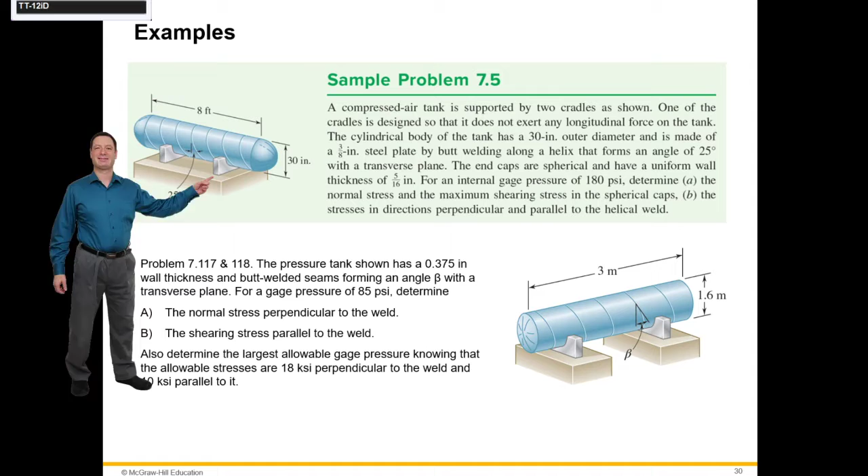So we're going to be looking at basically the stress element that's on its side. This is the sample problem we're going to do right now. Let me switch over to the document camera. Hold on. All right, so here we are. Yeah, this is live, this is working.

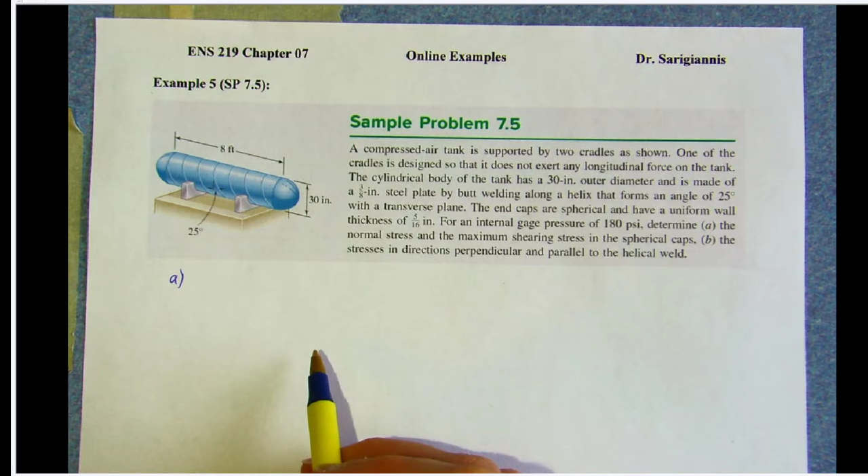So part A is to look at the spherical caps, right? Let's just consider what's going on here. Let's see, we have a few things. This is not necessarily part of the problem, but I do want to bring this up. So consider you have a shell wall of a certain thickness here.

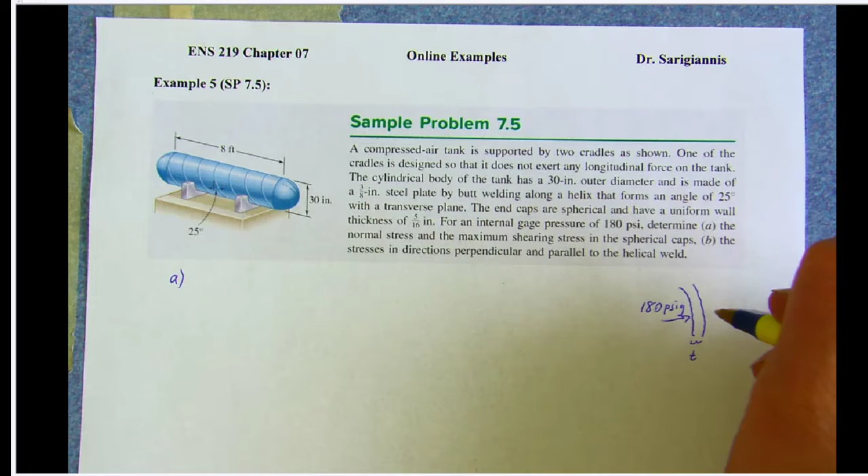If you have 180 psig on the inside, right, this is gauge pressure, so we only have to worry about gauge pressure. And this is why a lot of cylindrical manufacturers - pressure vessel specs and stuff are listed in PSIG. You don't have to worry - you typically use these things at atmospheric pressure.

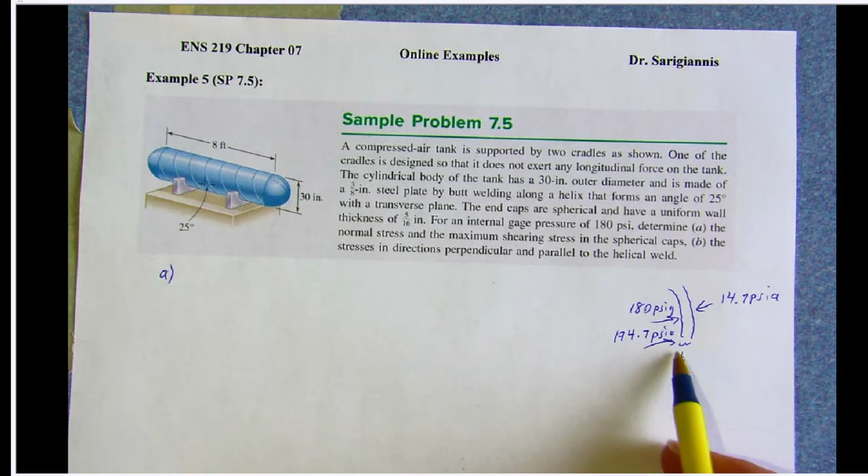So there's 14.7 psi on the outside - this is absolute pressure, right? So internally you actually have 194.7 psia, but because you have 14.7 on the outside, those two - basically the 14.7 on the outside and the 14.7 on the inside cancel out. So you wind up with a net 180 psig on the inside. You guys should remember this from thermo.

Yeah, so that's one of the things that tie these things together. Also, remember for thin-walled analysis, R over T should be greater than or equal to 10. So what is that? R is - where is R? Oh, 30 inches OD, so R is 30 inches, and thickness is, we'll take the bigger one, 3/8.

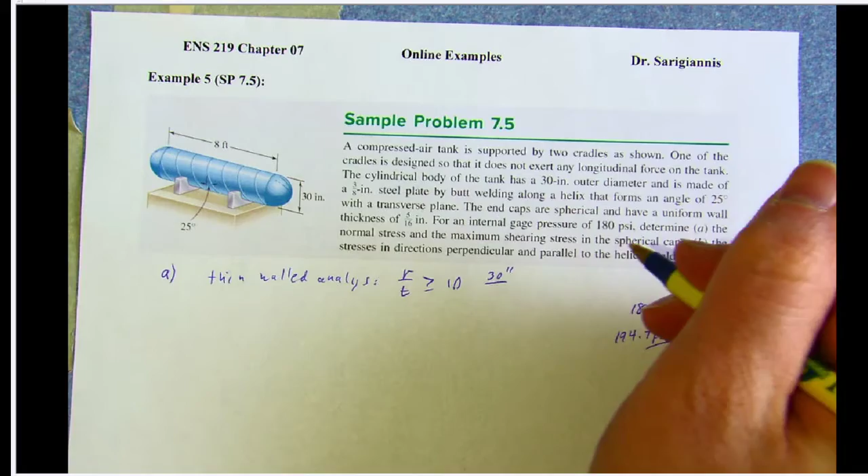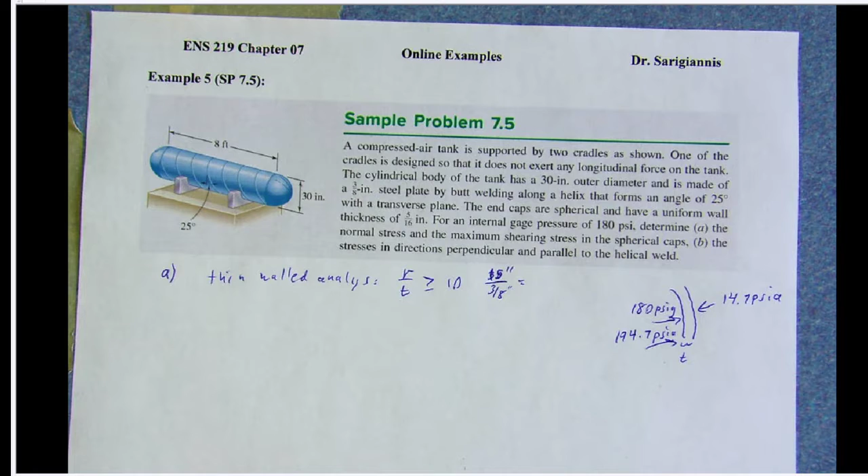And this is going to be, basically - wait, did I take 30? It should be 15. Radius is 15, I was like that doesn't look right. Yeah, so 15 divided by 3 is 5, times 8 is 40, right? So that's okay, that means you can use the thin wall pressure analysis assumptions.

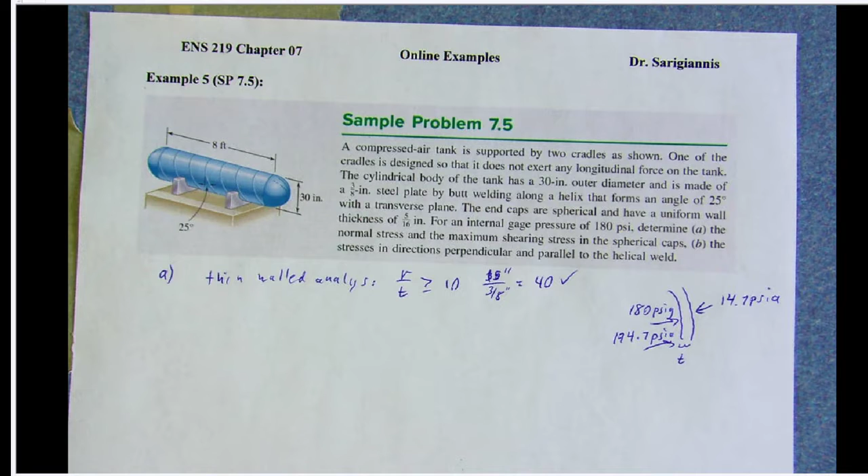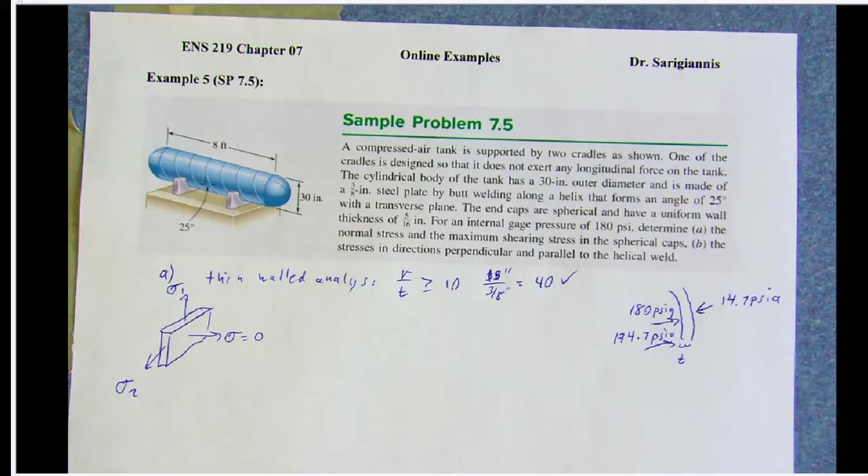Okay, so let's look at a component of this. A stress element anywhere on the sphere. Let's just draw it like this. We've got sigma 1 and sigma 2, and the analysis assumes that this is sigma equals 0, the sigma, or you can call it sigma 3.

So this is normal, so this would be inside pressure. This is an element on the outside here, right? Sigma 1 and sigma 2. Now for a sphere, right, for spherical caps, sigma 1 equals sigma 2, and that's equal to PR over 2T. This is equation 7.36 in your text.

Our actual radius is technically not 15. The radius is actually 15 inches minus the wall thickness. So for the sphere, we've got not 15, 5/16 inch. So the radius is 15 minus 5/16 inch, and this is going to equal...

14.6875 inches. So sigma 1 equals, we've got 180 psi, and we've got a radius of 14.6875 inches, over 2, and then the thickness here is 5/16 of an inch. So we wind up with a sigma of 4230 psi. And remember, that's in both directions for a sphere.

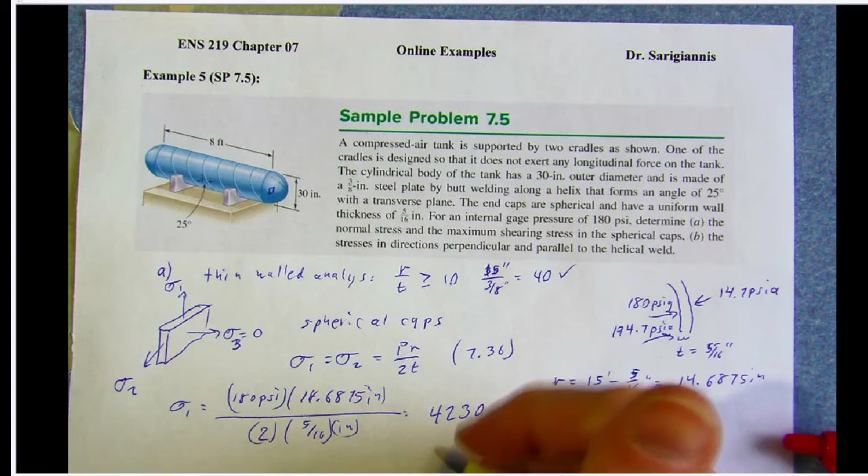This is just sigma 1 and sigma 2. So this is the normal stresses, right? These are the normal stresses in the sphere. Normal stresses.

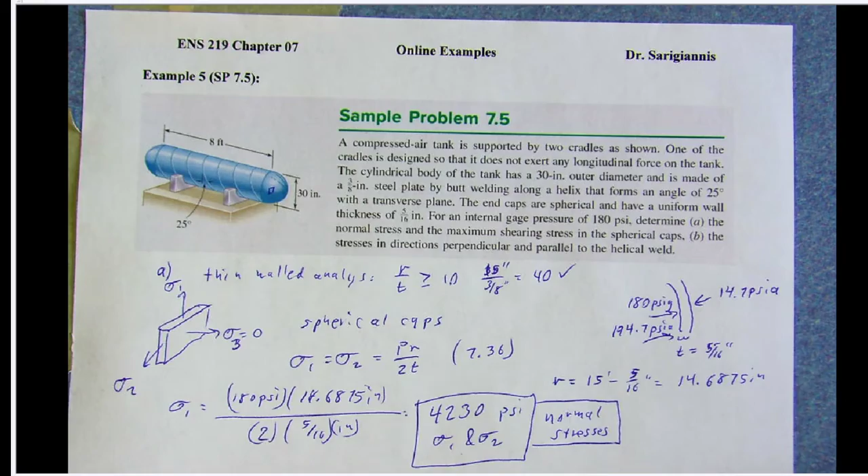All right, for a spherical shell, we know just from the text - I'm trying to remember if this was in the video - tau max is just equal to 1/2 sigma. This is actually explained in your text using a Mohr's circle, but it's basically because both your sigmas are the same, right? Sigma 1 and sigma 2 are the same.

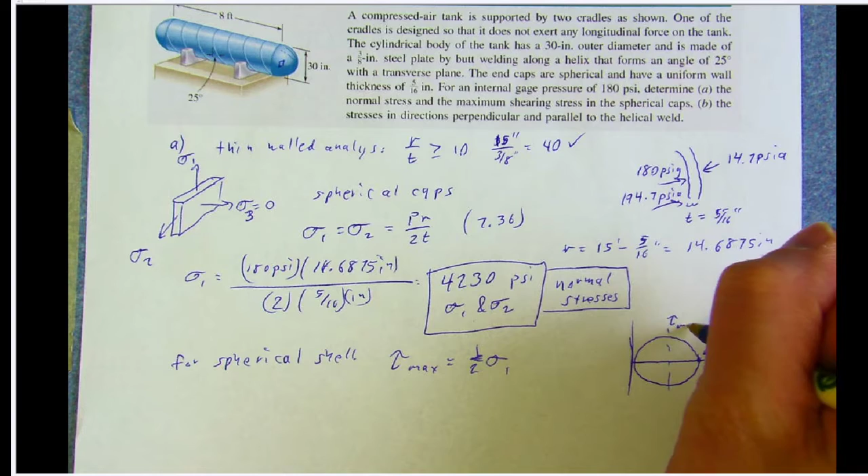Your Mohr's circle looks kind of like this. You've got this point here, this is sigma 1 and sigma 2, right? And you wind up with a circle that goes around like that to 0. Because there is an orientation where you have - so you have an orientation where you have a tau max, right? It's just the radius of the circle, which is just 1/2 sigma 1.

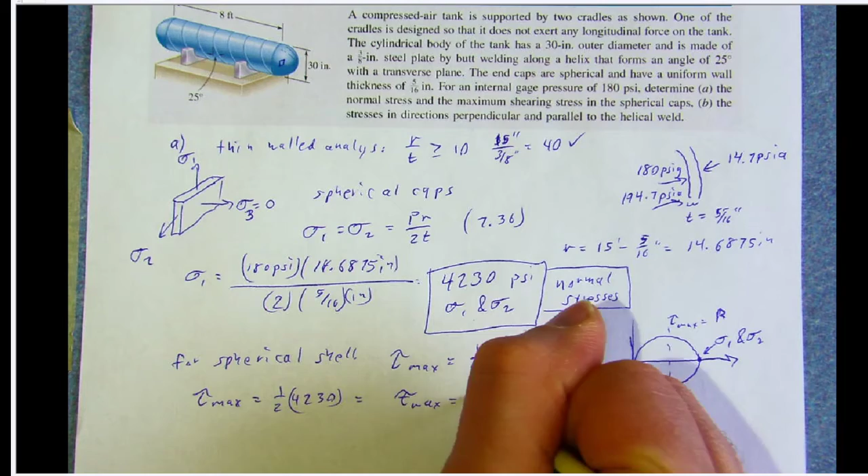So tau max equals 1/2 of 4230, which equals - and I write this down - tau max, 2115 psi.

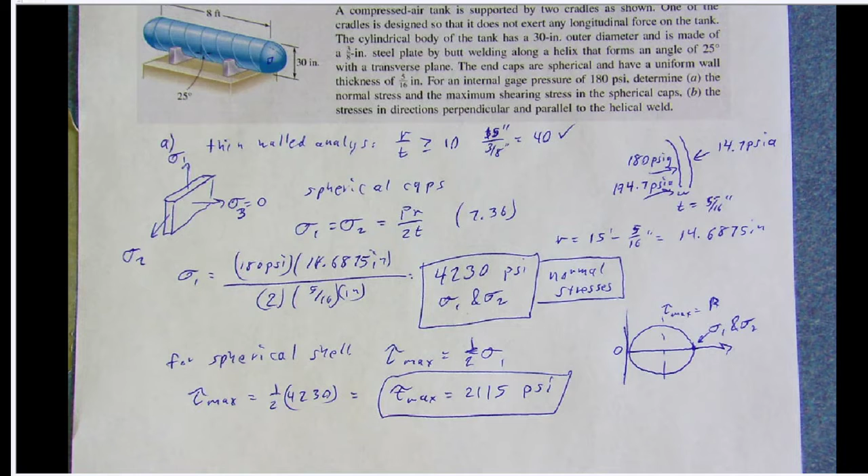This zero, I should mention, actually comes from the 3D analysis, right? So if you want, hopefully you watched the video on the 3D analysis, which shows you can make the overall circle. Ideally - well, not ideally - but this is basically happening in the plane tangent to the surface of the vessel. So that's where you're finding that shear stress. Max shear stress is 0.

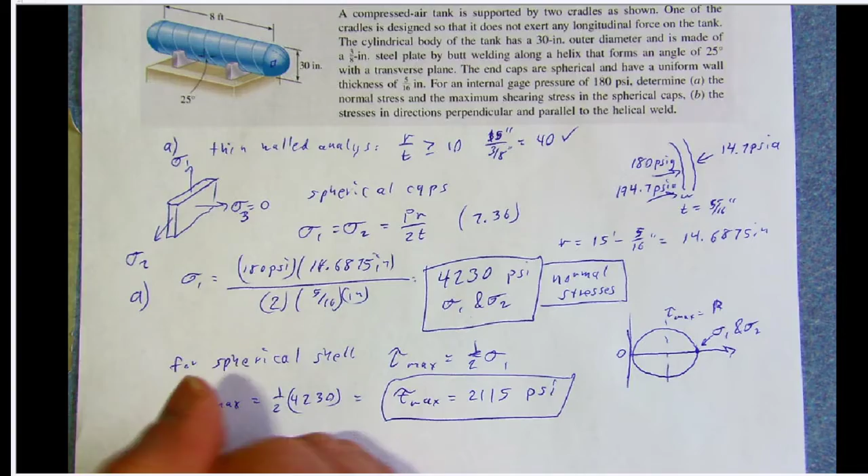Yeah, all right, so that's part A. Let me just label this part A. Part B is looking at the stresses in directions perpendicular and parallel to the helical weld.

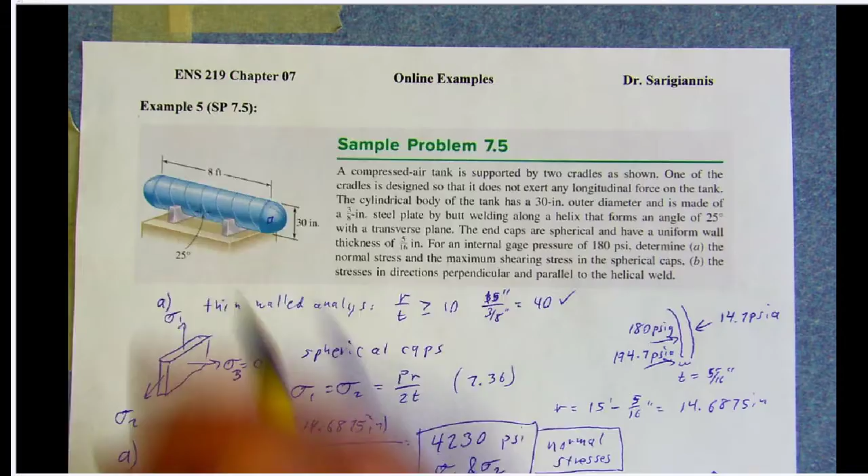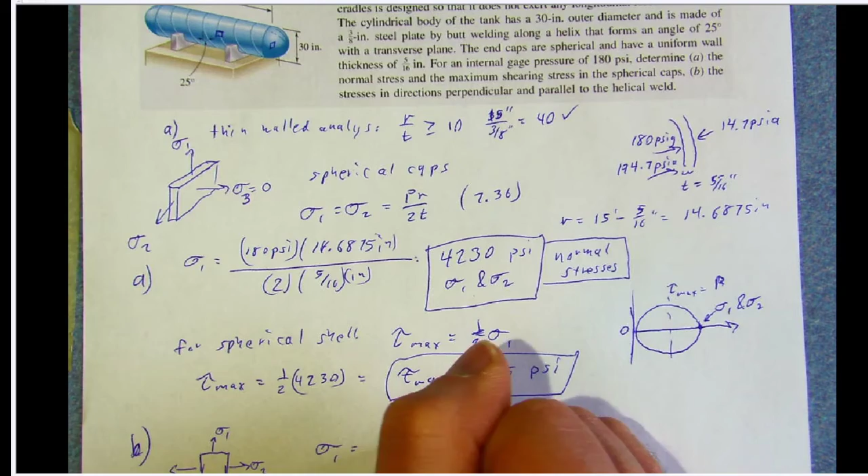All right, so let's just pretend for a minute here you're some kind of element on this cylinder, right? So if you're a little element on this cylinder, any point in that cylinder you're going to have - and remember, they define sigma 1 and sigma 2. Sigma 1 is the hoop stress, right? This is the stress if you were to cut this cylinder this way, and look at a hoop, that's the stress around the hoop, right? And sigma 2 is the longitudinal stress.

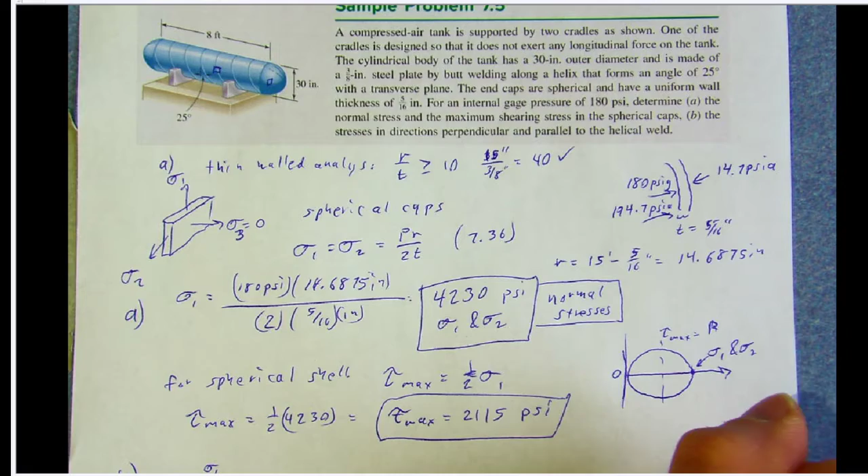And that's the stress along the length of the cylinder. And remember, that's typically the lower value - well, it is the lower value. So sigma 1 is... so what we have to do first is find, for a given element, we have to find these stresses, right? The hoop stress and the longitudinal stress.

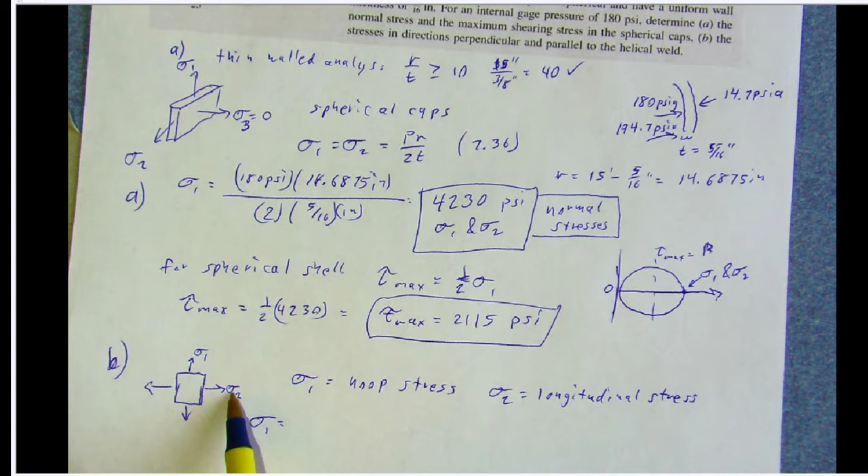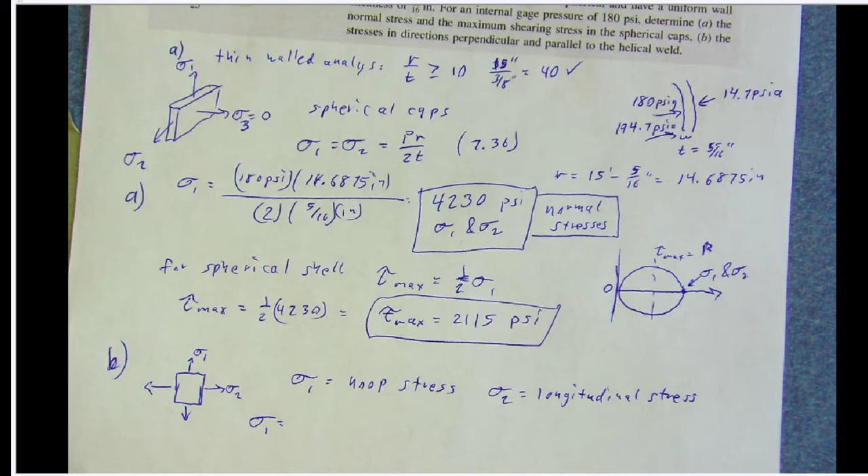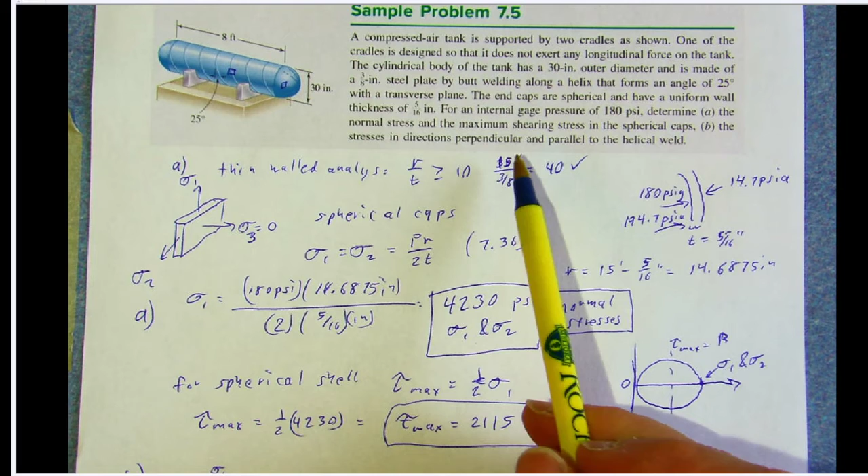Then we can look at the orientation of the weld, and we can use Mohr's circle to reorient this element to align with the weld and figure out the normal stresses and shear stresses on the weld, right? So the stress perpendicular to the weld is going to be the normal stress at that angle, and parallel to the weld is going to be the shear stress.

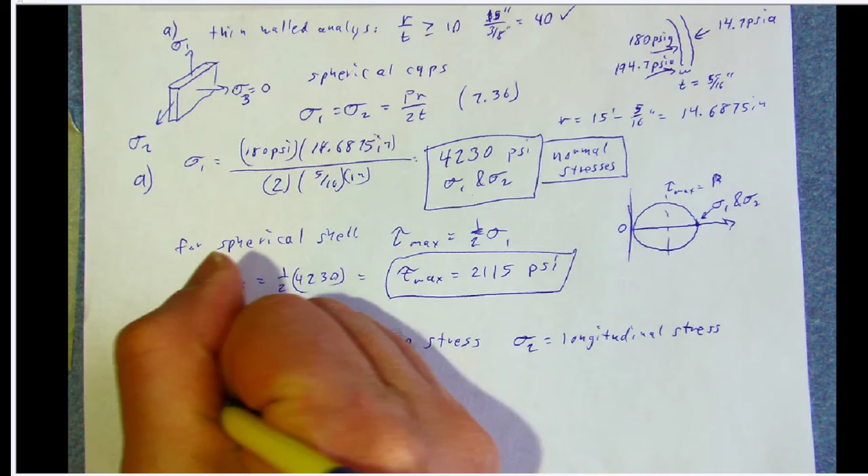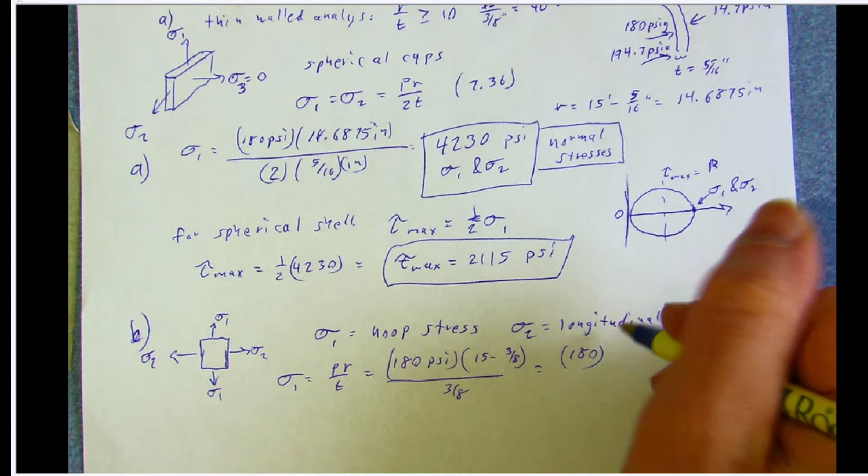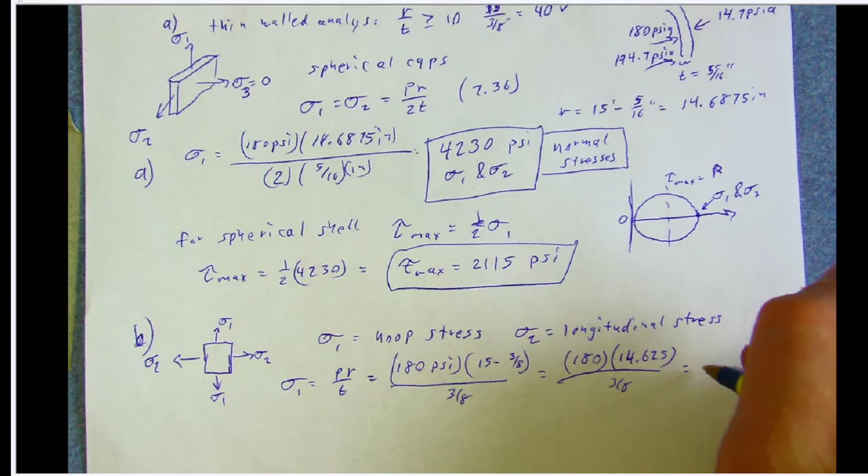So that's going to be 15 minus 3/8, over 3/8. Let me just write the numbers in here: 180 times 14.625 over 3/8. This gives you 7020 psi. So that's sigma 1. Let me write this in up here on the diagram.

Just remember they're using English units. I'm not going to crowd up that diagram too much.

Sigma 2 is the longitudinal stress, given by the equation PR over 2T. It's half of the hoop stress, so it's just 1/2 sigma 1, and that's 7020, so that's 3510 psi. So that's here.

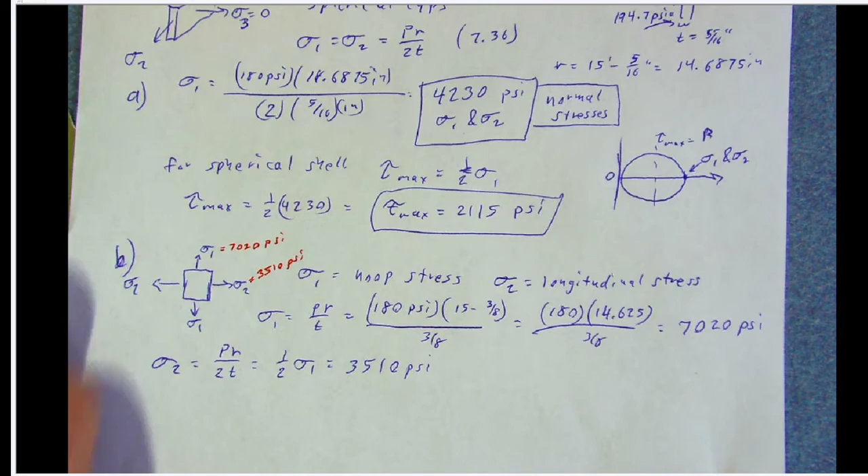Oh, I said I wasn't going to write units, and then I did. I'm a liar. All right.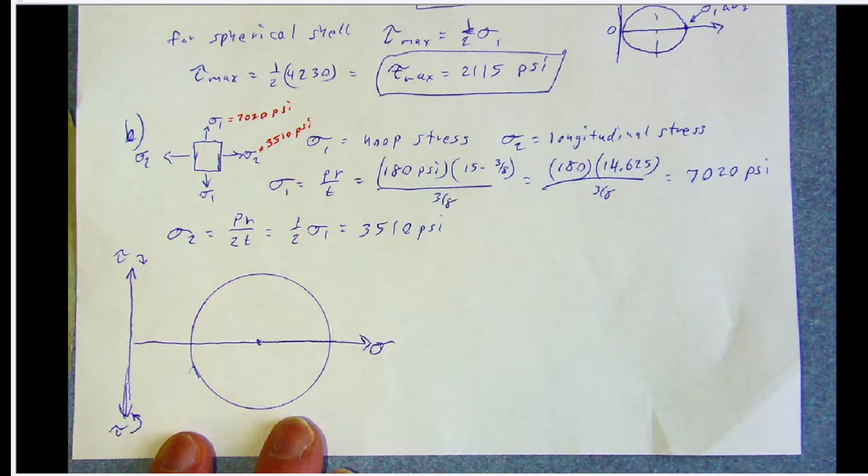So now let's see if I can fit this on here. We're going to use Mohr's circle here. Let me pause this for a minute. Okay, this is not really the most legitimate way to draw Mohr's circle. I do the circle first without putting any of the information on there. And this is really not to scale.

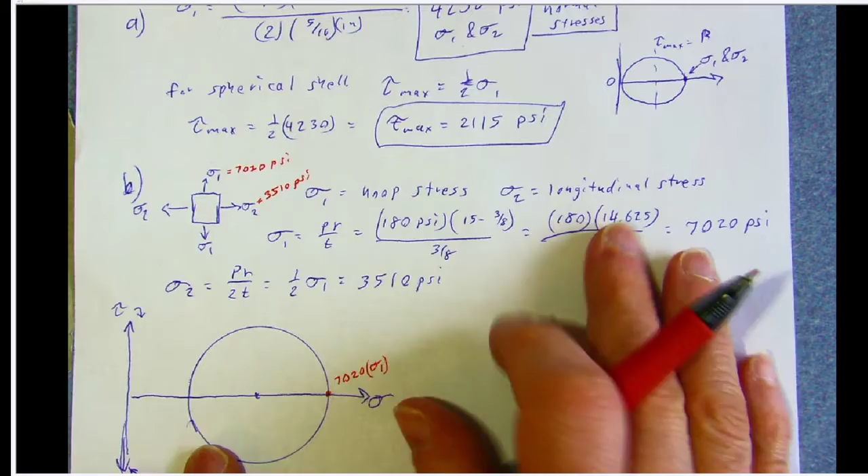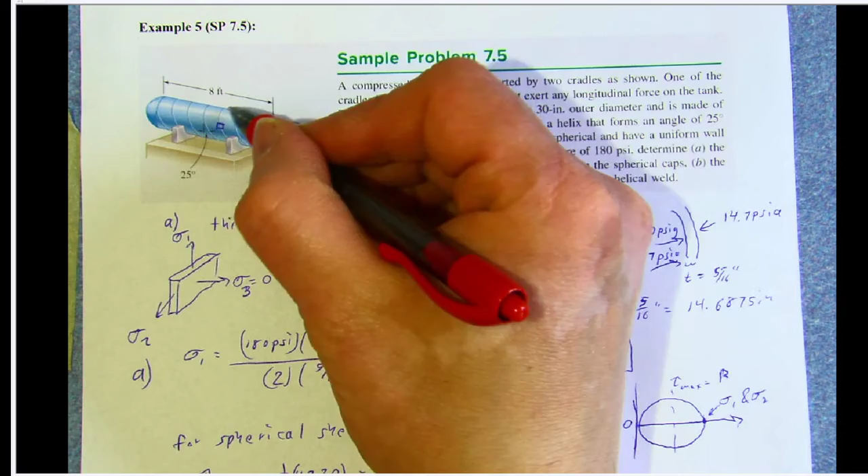This point here is the 7020, this is sigma 1. In your textbook, they use axes A and B instead of X and Y, because these are oriented along the cylinder. Anywhere along the cylinder wall, so they use A as the one that runs along the curve of the cylinder, and B that runs along the longitudinal length. So we'll use that notation.

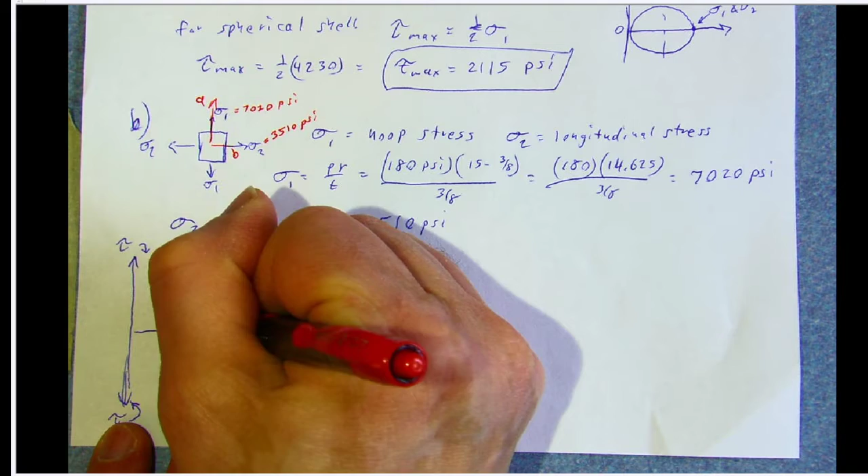This is the A axis, and here we've got 3510, and this is the B axis, and this is also sigma 2. So here's your Mohr's circle, and this one in the middle is just the average.

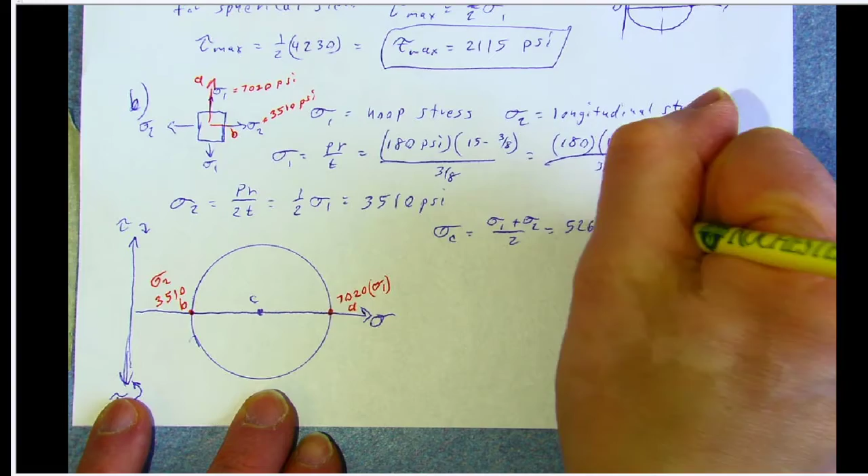Let's write this out. I'll call this point C. So sigma C is just sigma 1 plus sigma 2 over 2, which is the average of the two. So it's 5265 psi.

5265 right here. I mean, you could take the difference, divide by 2, and then add it to the bottom, but that's just a nuisance, so it's just the average. The radius R is going to be sigma 1 minus sigma 2 over 2, right, it's just the difference between these two divided by 2. And that's going to be 1755 psi. So that's the radius.

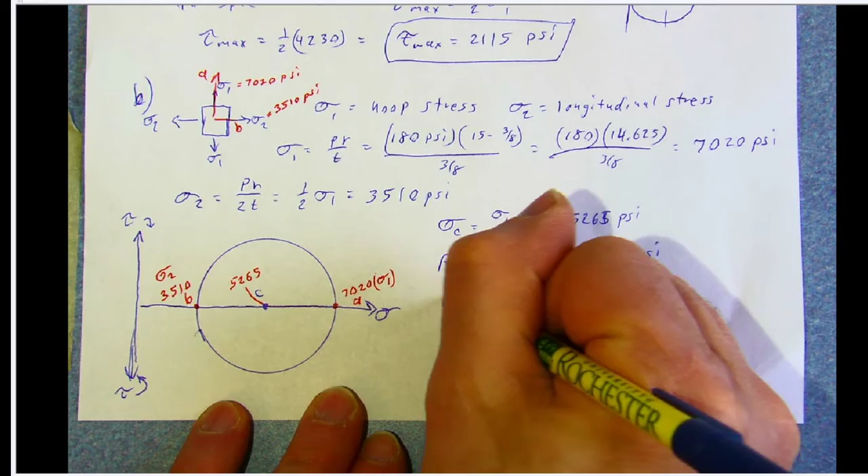Now we have theta of the weld, right? The theta of the weld is 25 degrees. I'm going to have to go to another sheet of paper here. Let's see, do I have one? Oops, this is another problem. I'm afraid to pause my video again.

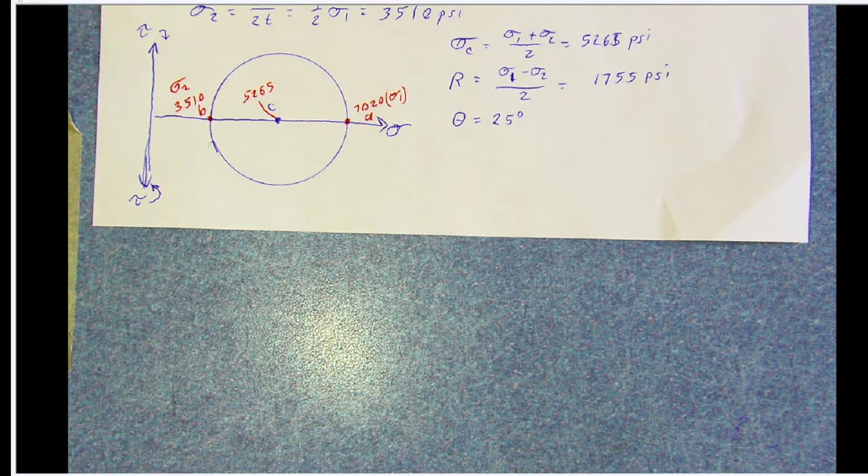Sample problem 7.5 continued. All right, so we have this element that's angled, and this is angled at 25 degrees.

So picture, let's see. I should put a little line here. This is the weld, right? The surface of the weld runs along this way.

And we're going to call this, so notice my axes, sigma 2 is B axis. So I'm going to call this, oh geez, did I mislabel these? Hold on a second, B prime. Let's see what I do. Don't think I mislabeled these.

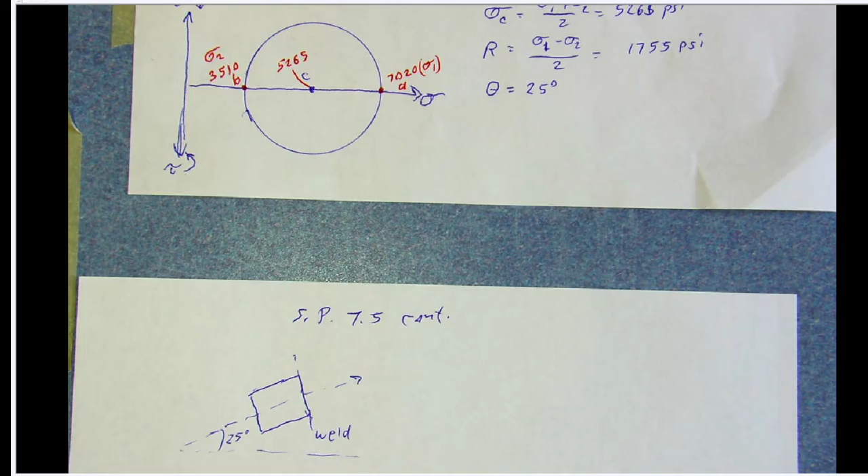No, this is not mislabeled. This is the A prime axis. Sorry, this one up here. Yeah, these are not mislabeled.

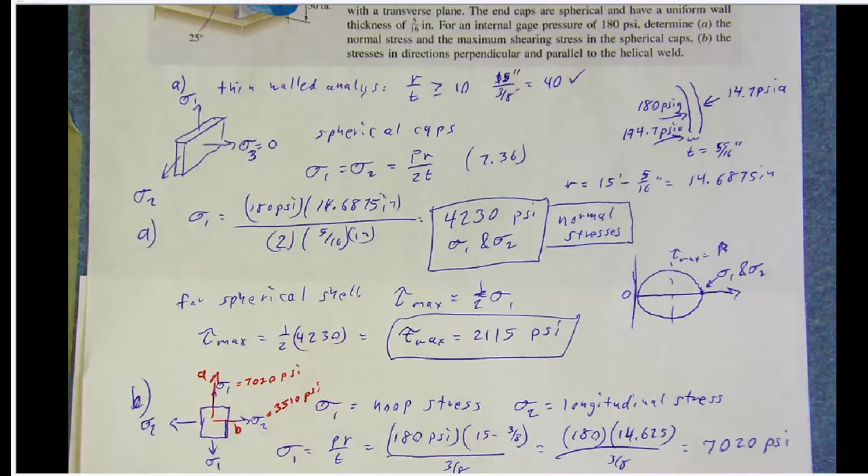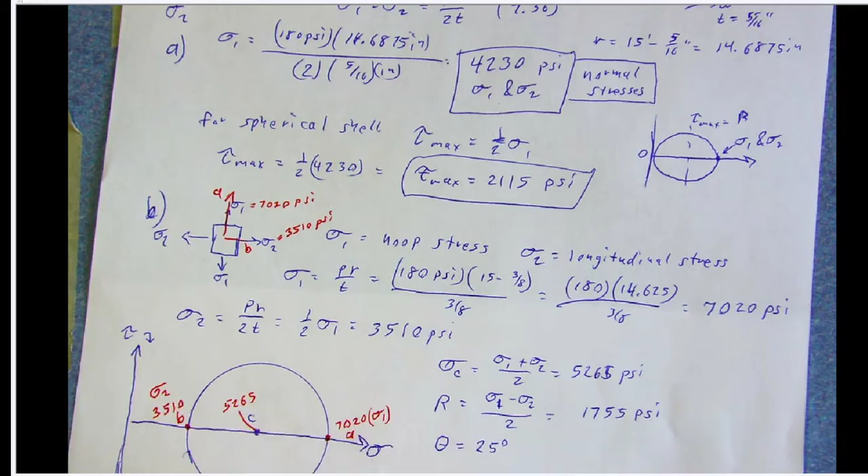Okay, so we're taking this and we're angling it, and this is B prime. Yeah, so I wrote my notes wrong, this is correct up here. Sigma 2 is along B. We've rotated this element, so this is B prime. Sorry about the confusion, guys.

All right, so we're looking for the normal stress along this weld. So this is going to be sigma B prime.

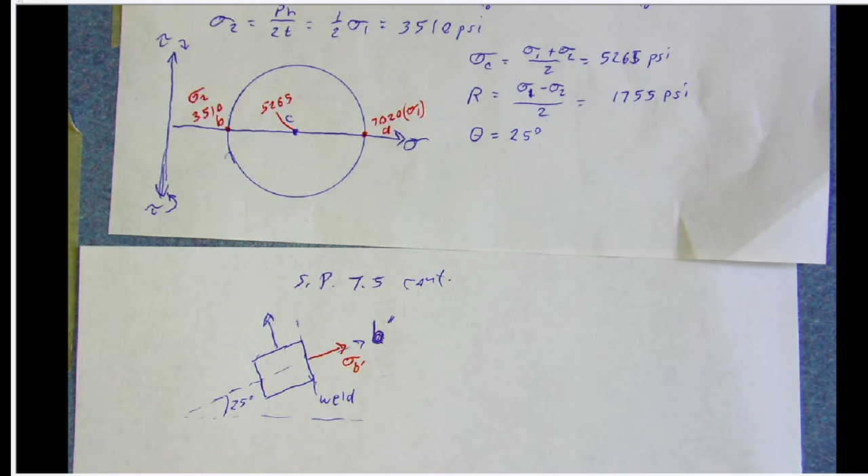So now if we look at Mohr's circle here, remember theta is 25. So in Mohr's world, 2 theta is 50 degrees. So we're going to rotate this whole axis by 50 degrees. I'm not going to claim to draw the correct angle, but I'm going to try to draw something more than 45 degrees.

All right, so here I have 50 degrees, and notice here I also have 50 degrees. This is where it's getting a little confusing, because you started off with Mohr's circle using X and Y,

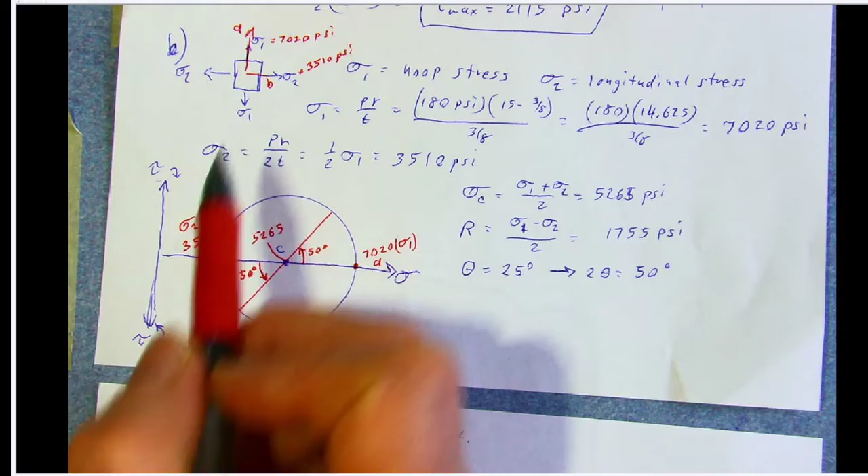but we're switching over to A and B. So A is the maximum, B is the minimum. Notice now I've rotated both of these axes. This is A prime and this is B prime here. So what you can do is use this triangle here. Let's see, how am I going to draw this?

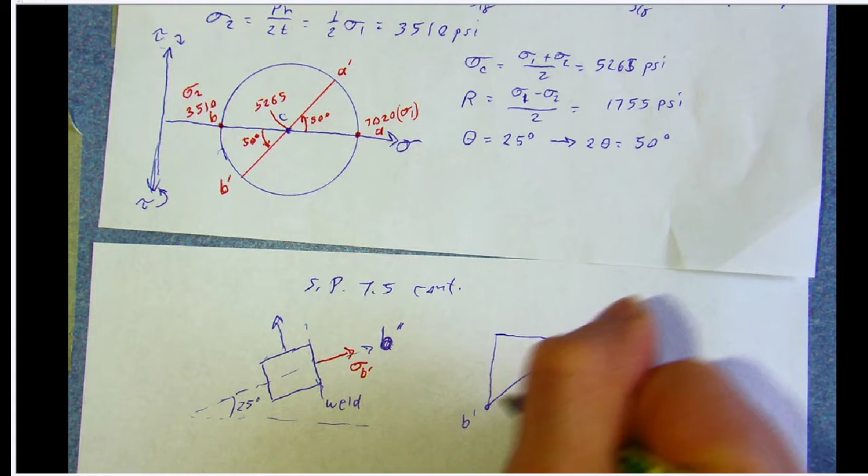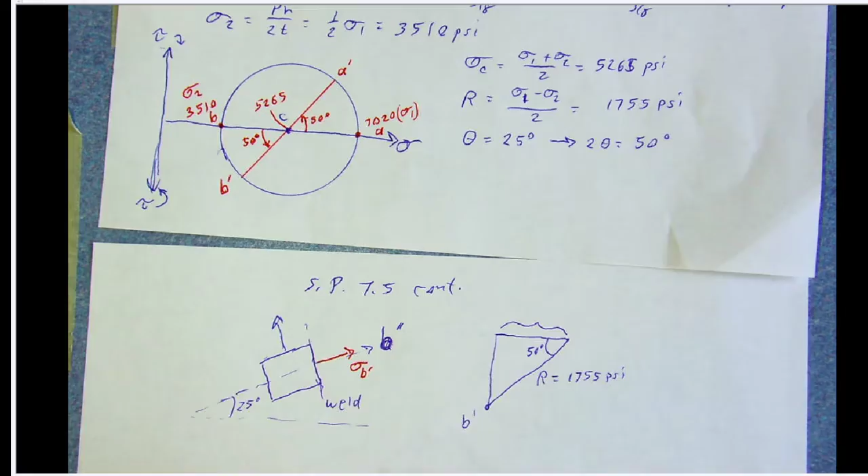B prime, this is the radius, equal to 1755 psi. This is the angle of 50 degrees. So this distance here is over here. So we can find

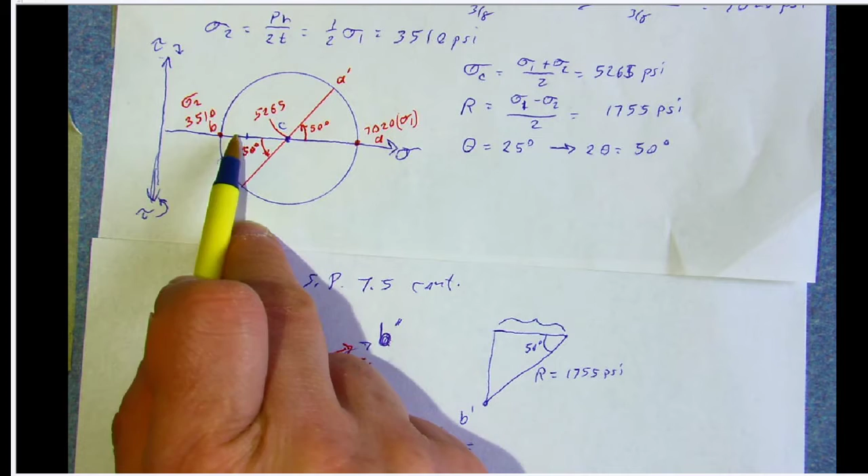sigma B prime as equal to, so this would be sigma B prime. This is sigma B prime, notice it's on the stress axis. This is going to be 5265 minus cosine of 50. This is sigma B, well, that's just the length of it. Sigma B prime is actually right here. And this is 5265, that's the length here, this length L.

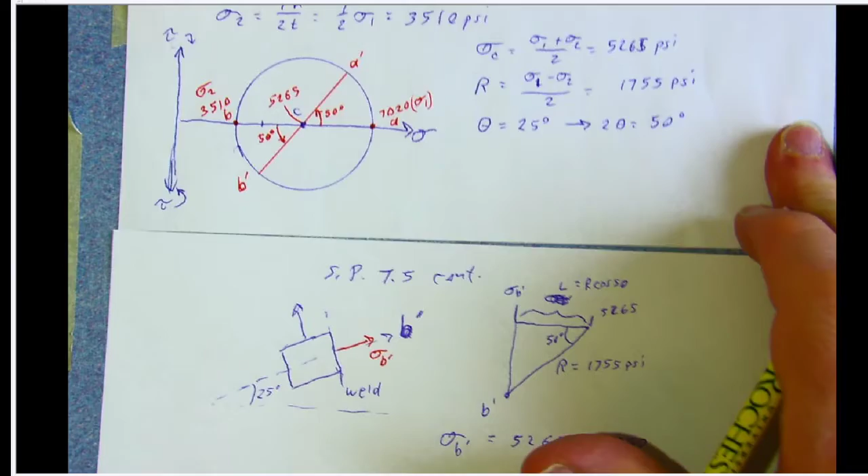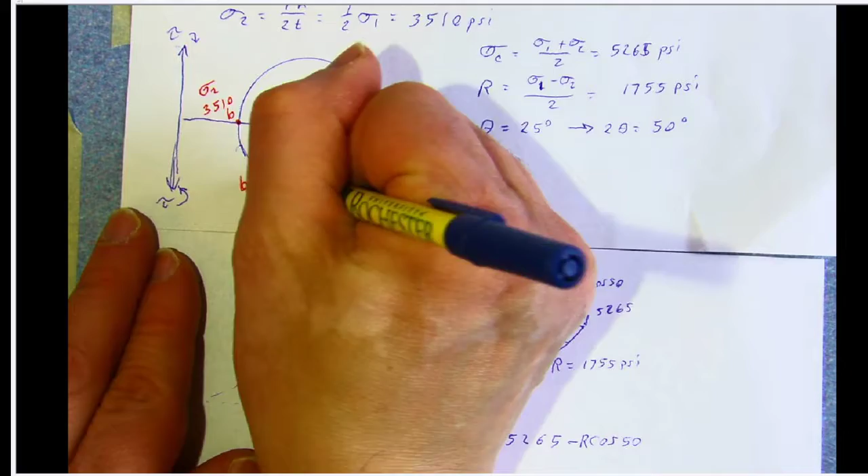So this is cosine 50. Oops, I need the radius, R cosine 50. All right, I think I've tried to use too many diagrams to demonstrate a very simple concept. All we want is the stress corresponding to the B prime point, and that's this. So here we have 5265 minus R is 1755 times cosine 50, and we get sigma B prime equals 4137 psi.

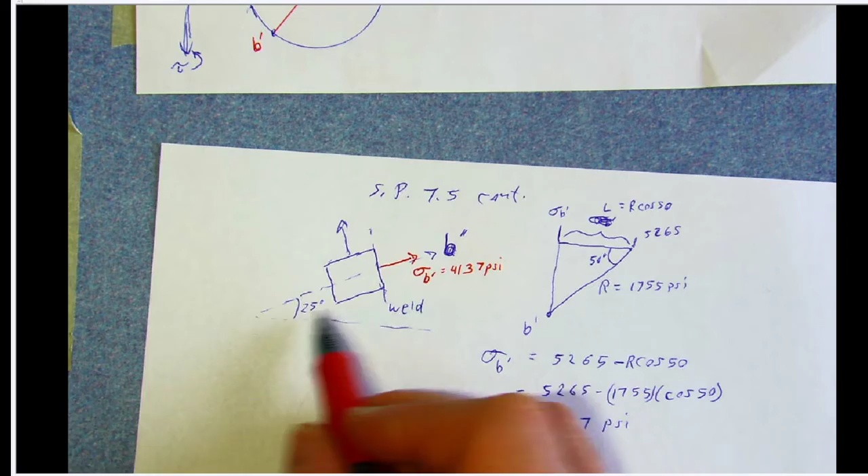4137 psi, so that is the normal stress on the weld. This is the orientation of the weld, it is oriented 25 degrees. Look at it from the vertical, this is also 25 degrees.

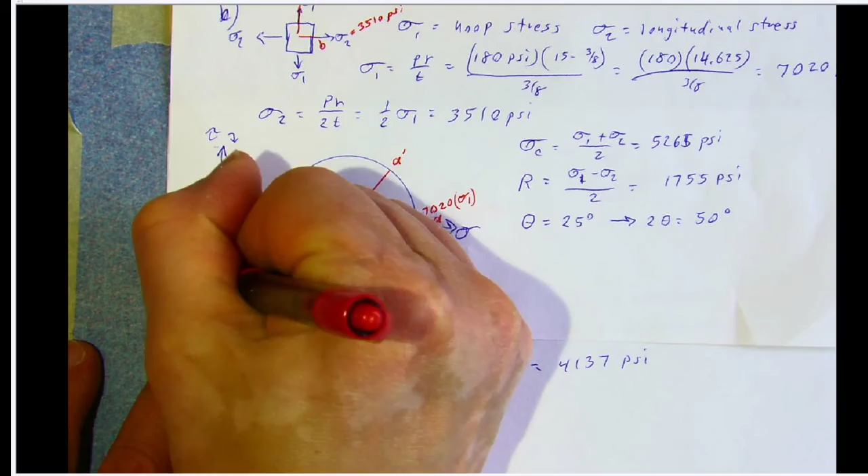Now we need to know the shear stress. So the shear stress is just, if we look at Mohr's circle, the shear stress is just this value here. This is tau B prime, and that's the height of this triangle. So over here, that's this, tau B prime.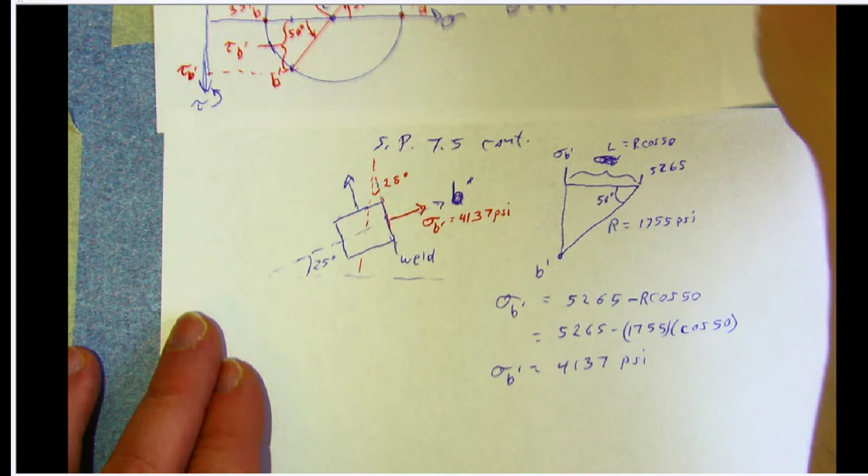So tau B prime is just equal to, we'll put a little, whoop, my screen froze, I don't know why. Okay, I think, oh, I gotta check my sound. You never have, okay, well I always have too many problems with this.

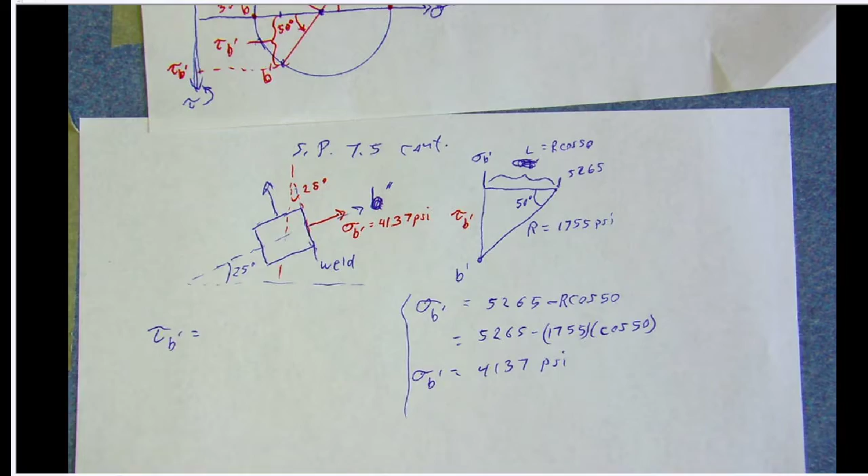All right, tau B prime is just going to be R sine of 50. So this is just 1755 sine of 50 degrees, and tau B prime equals 1344 psi.

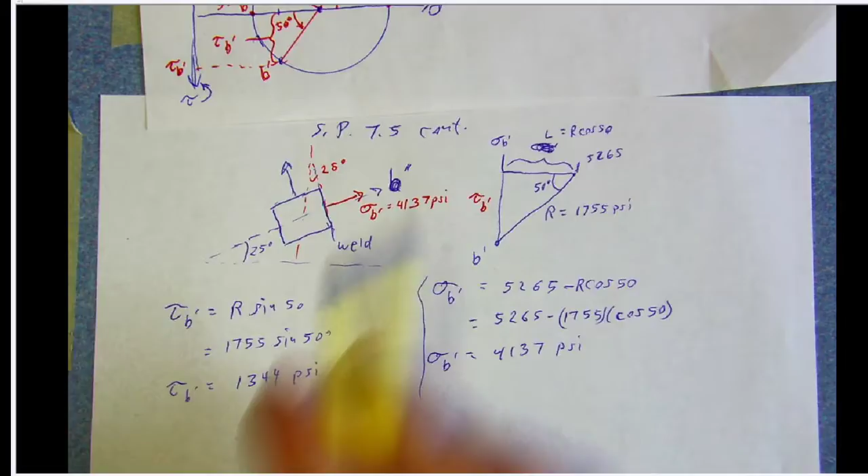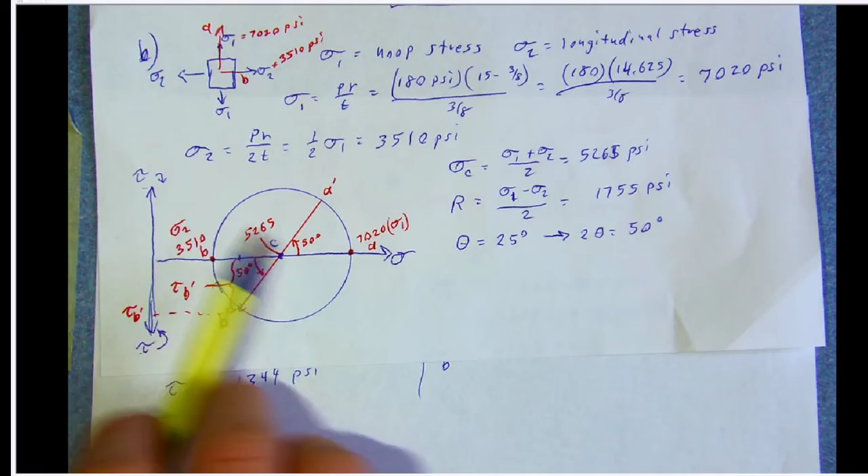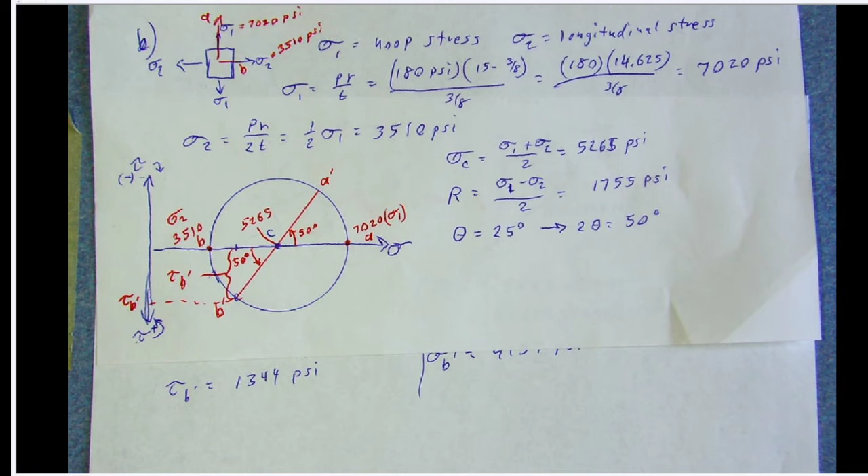Now notice where it is on the Mohr's circle. So I drew this, remember the bottom, well, you can use clockwise. The clock is above the counter. So counterclockwise is below, clockwise is above. Or you can just remember down here is positive, and up here is negative. It's just flipped. Any way you remember it, this indicates a clockwise rotation on the element. So that means the shear is going to be acting in this direction.

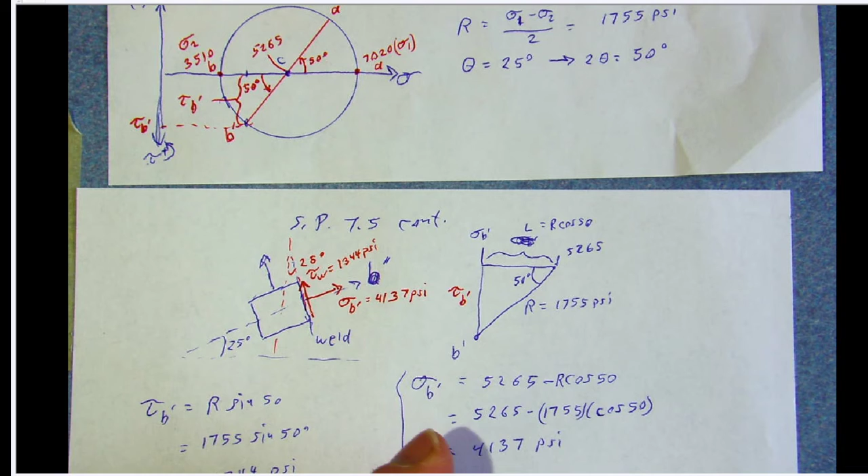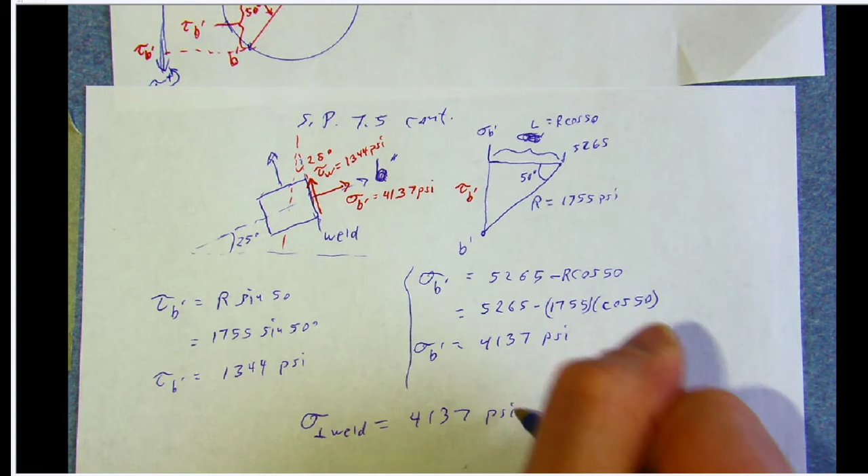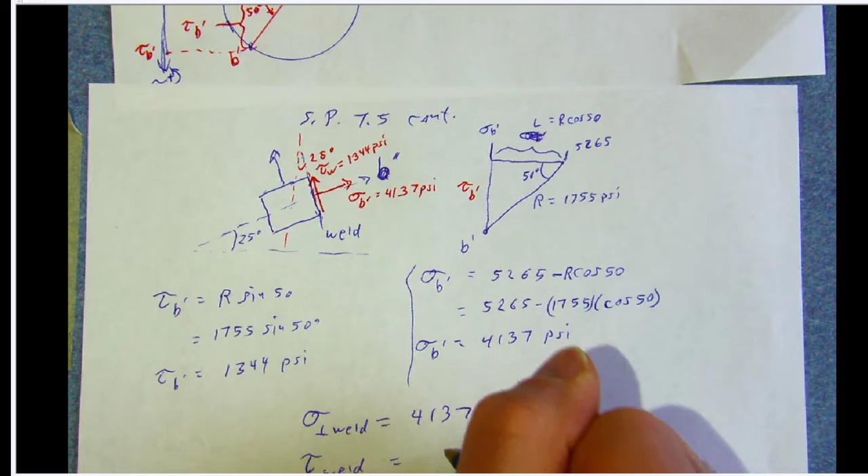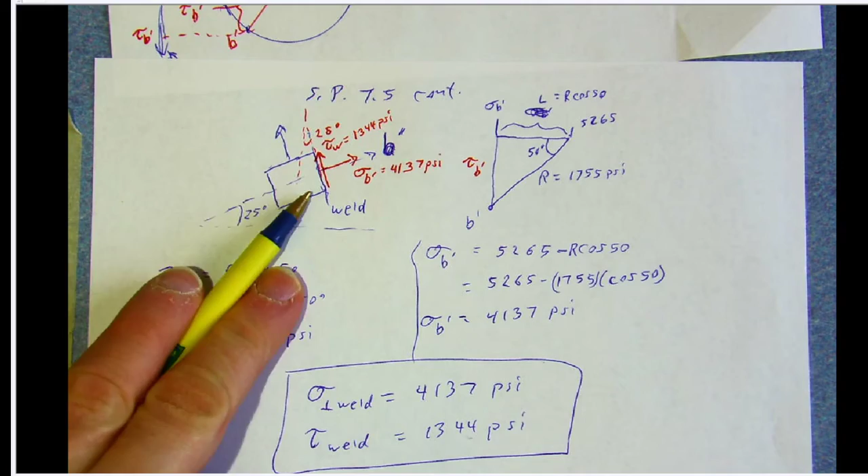So here we have tau of the weld equals 1344 psi. So the actual answers to this are: stress perpendicular to weld equals sigma B prime, 4137 psi. And the shear stress, which by definition is parallel, so the shear stress of the weld is 1344 psi. So those are your answers for part B, and this is what it looks like on the element.

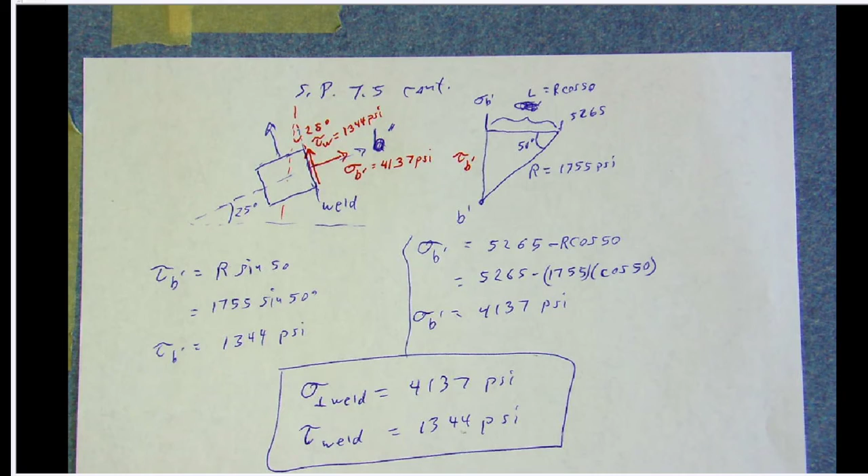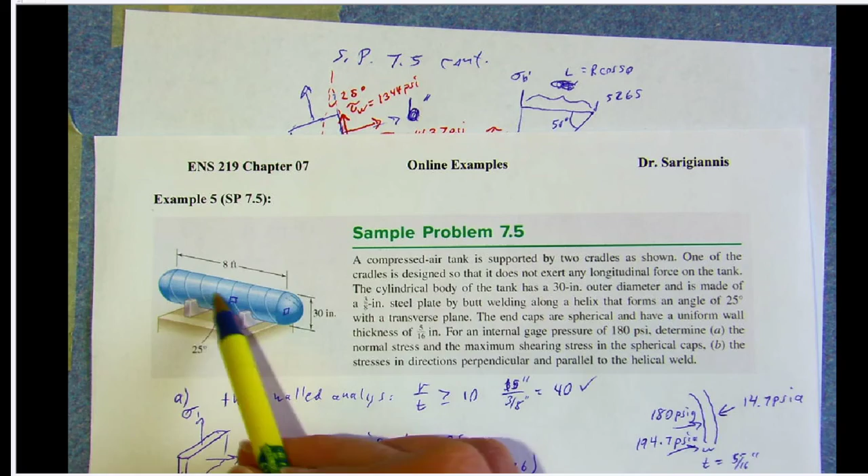This is the usefulness of being able to calculate stresses and then rotate them to different angles. You may have a weld that, and this happens a lot, you have a vessel, and maybe the vessel itself is made up of rectangular plates, welded along the longitudinal direction and that way, but you may have to do something at a port or manway where the welds are not necessarily in the directions you want. Especially if it's a circular weld, you have to look at all the different angles. But you may have to weld at some angle, and knowing how to calculate that stress is important for structural analysis.